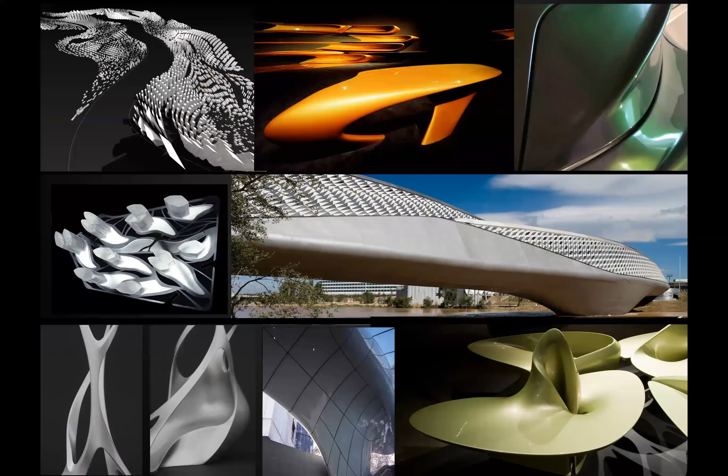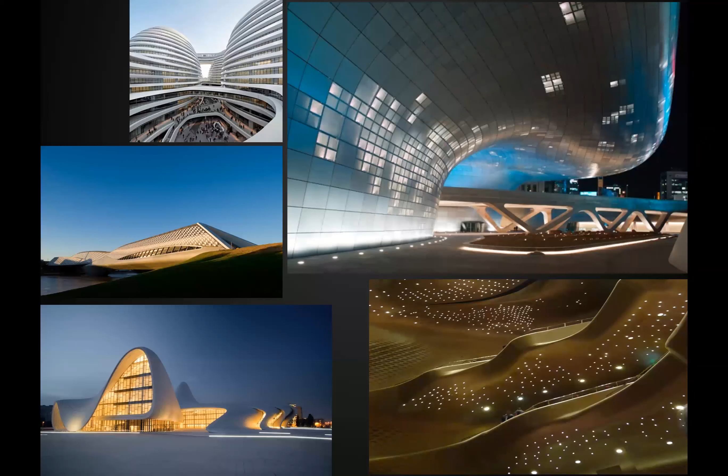Personally, I had the privilege of witnessing the whole process, as a spectator, but also as a main driver and designer at the office of Zaha Hadid Architects, where I've been working since 2005. So I've seen the whole process of acceleration from the early studies, from the beginning where the goal was exploring new forms, to the moment where the urge of making these forms buildable and rational became a much more important focus of the design.

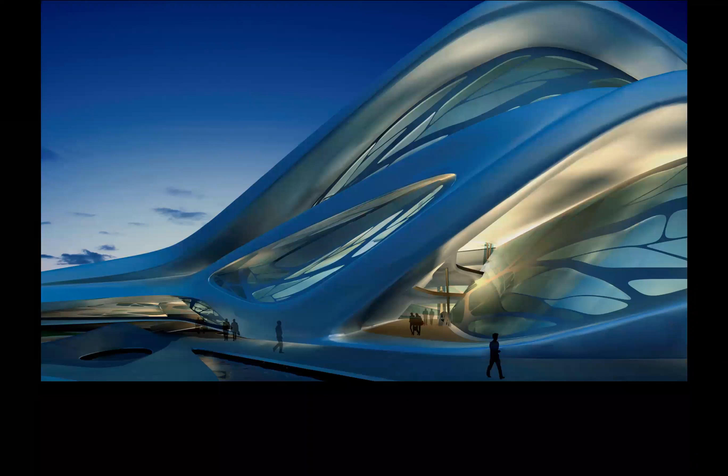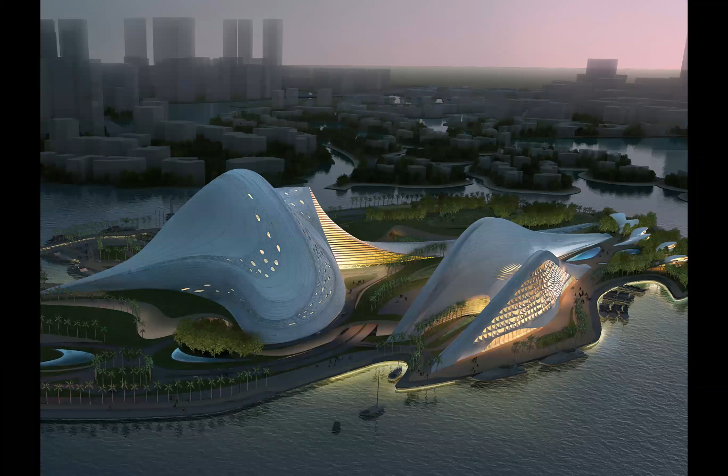Why is that? Because on one side, we managed to achieve beautiful buildings, incredible milestones in architecture. On the other side, there were also a lot of buildings which never happened and will never be built, like the Abu Dhabi Performing Arts Center here, or the Dubai Opera House, because they were simply too ambitious.

I do believe that this is only a transitional period. That's really important to understand. But nonetheless, for you as students and for any professional out there trying to engage with computational design, trying to push the boundaries of the discipline, if you want to translate this into something which can find an alter ego, can actually be brought to reality, it's really important that we think about the dualism between complexity and constructability. In many instances during my career at Zaha, the idea of rationalizing a building and making it buildable came afterwards. I think this is the moment where we need to think about merging these ideas since the beginning, since the concept.

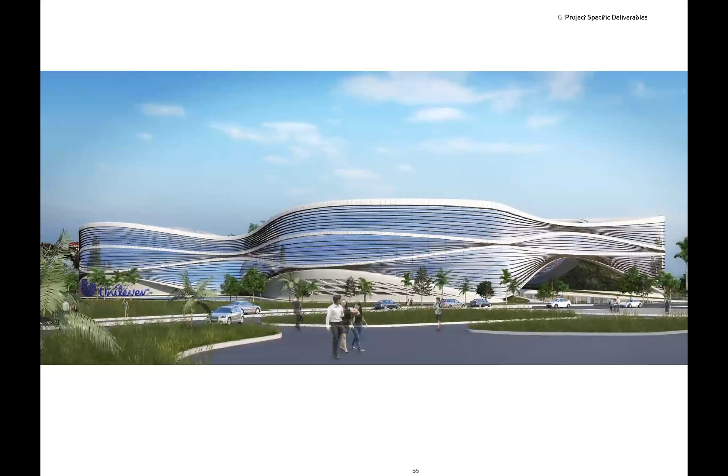That's why I'm going to show you first an example of a building which has been post-rationalized, and then an example of a building which has been imagined, conceived since the beginning to be smart, to be modular, to achieve complexity through a set of ideas and processes which could make it instantly more buildable. So the first building that I'm presenting is a building which unfortunately wasn't built: it's the headquarters of Unilever in Jakarta.

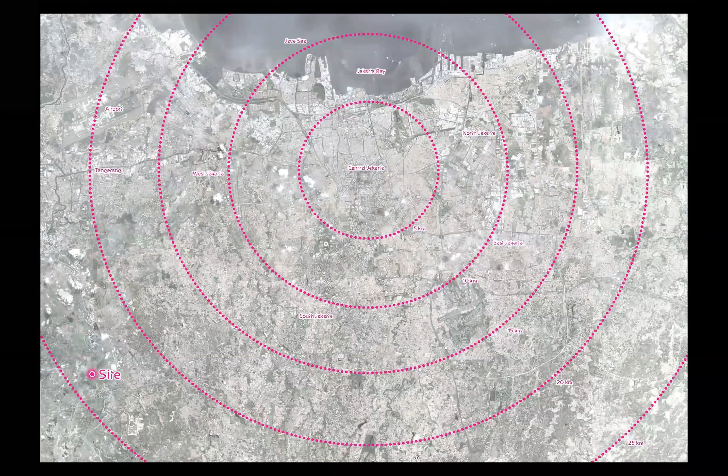It's a competition which me and my team managed to win. The idea was to make this headquarters for this very large company, which basically dominates the market of food, and pretty much whatever you find in a grocery store is a Unilever product.

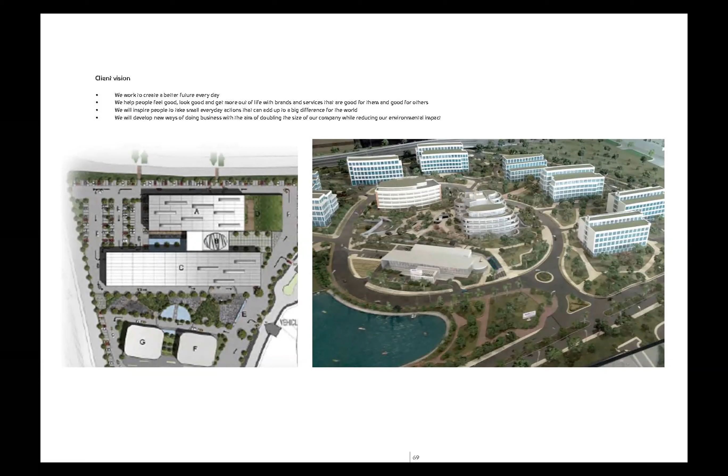The contest site was in the outskirts of Jakarta, in contact with a lot of vegetation, but at the same time with some buildings inspired by the way in Jakarta they crop and organize the cultivations. We were asked to make a building which really tried to integrate the indoor spaces with the outdoor spaces.

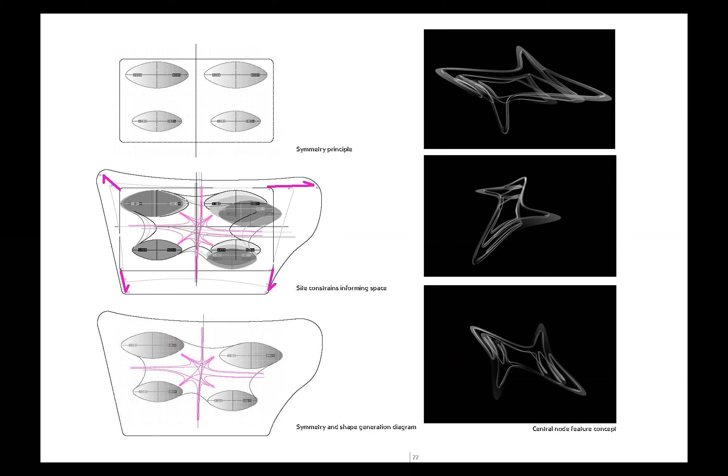So we came first with the concept from a distribution idea: having 4 wings, making sure that different productive departments could flexibly be arranged across the building, and could maximize the space using agile strategies, meaning not everyone is always sitting at the same desk, but departments can expand and contract across the building. That's why there was this idea of 4 wings and a central space.

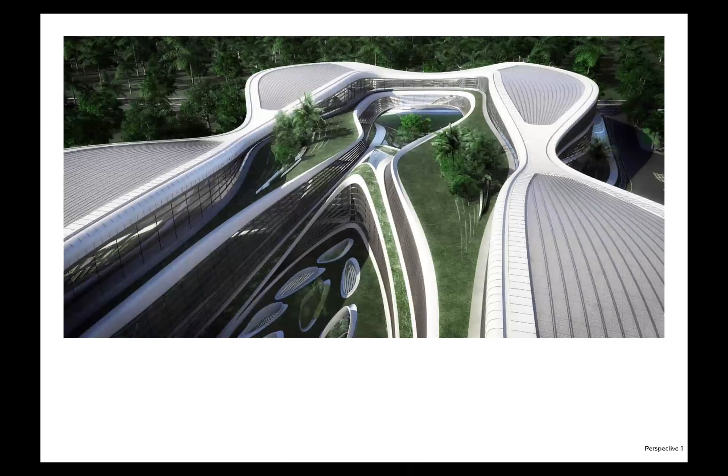Then there was the idea of bridging only the upper floors of the building, to make sure people could enter into this courtyard, which would become a more intimate inner space for the building. This is the idea of flexibility.

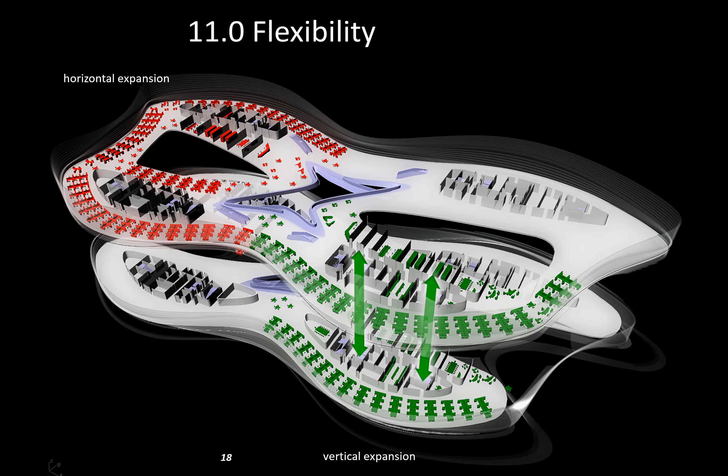The different wings would allow a department to expand both vertically and horizontally, since the 4 vertical cores could allow also for very direct distribution vertically, not only horizontally. The powerful atrium in the middle allowed the building to be interconnected visually, so there could be control over the production. There was this very strong idea of powerful atria and visual interconnection.

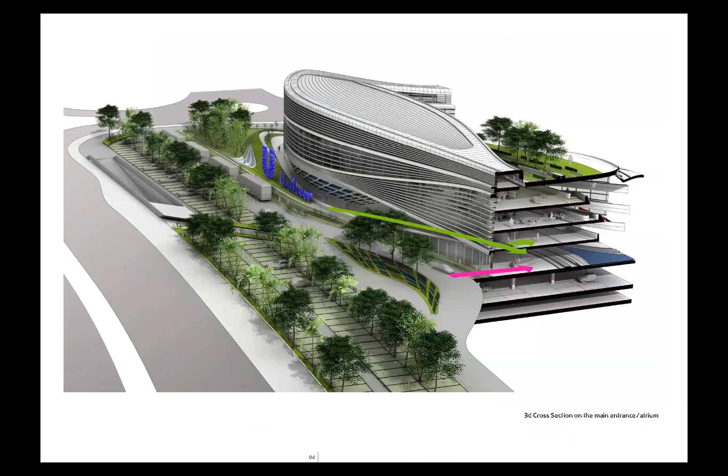Then there was the idea of splitting the flow of people regularly walking into the building, indicated with green arrows, from visitors, who are normally our clients or who have access to the ground floor of the building, where they normally showcase all products and how they want these products to be displayed in a store.

So in a way, the ground floor has direct access to the public, whereas there's this gentle slope which leads you to the internal courtyard, which separates the route of the employees from the route of the guests.

The problem with this was, at the beginning, the concept was based on a slight distortion, almost trying to adapt the building to the site. We won the competition, and we went through a cost consulting exercise with an external consultant, and the total cost of the building was close to 100 million.

The client came back to us and said, we like the concept, but the building must be more in the region of 15 million. So what we decided to do was undergo a very deep rationalization of the building, making sure that the whole plan could be described by continuous arcs rather than an S-spline.

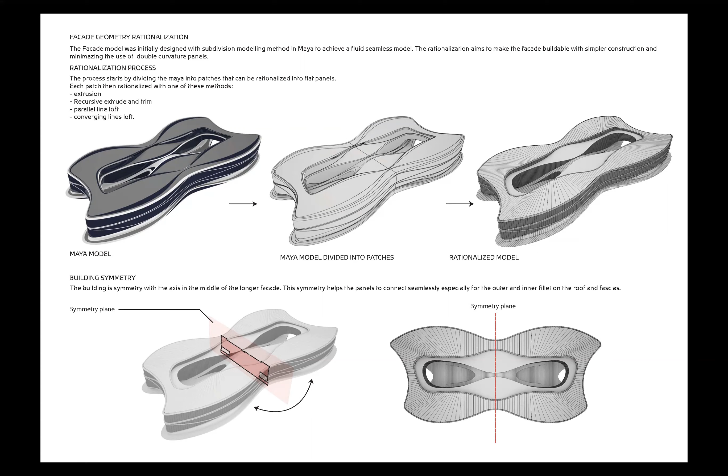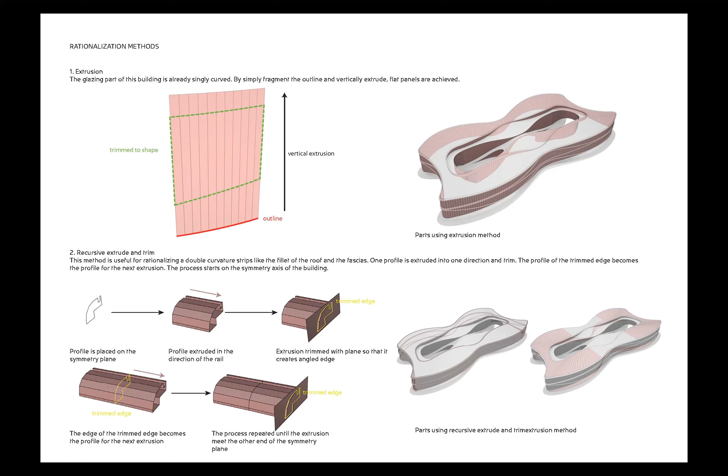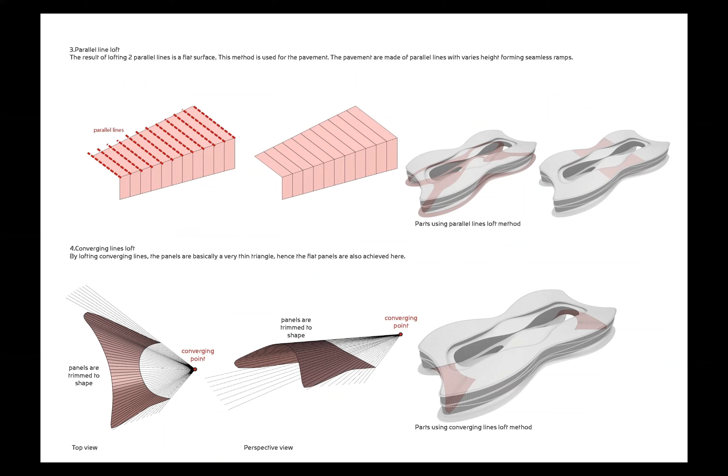We also went all the way trying to make certain parts of the building completely cylindrical, out of a straight extrusion, and other parts, like the underside of the bridge, rather than being a completely organic form, were basically a developable form based on a cone - a conic form.

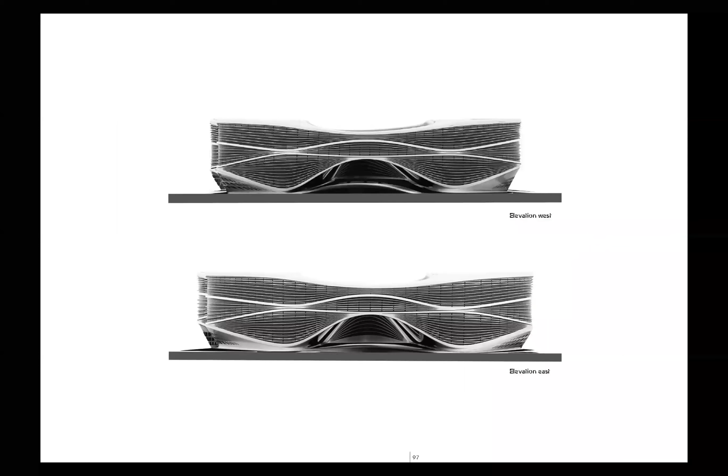All these things led to this more refined scheme in plan, which is very well rationalized. It allows for a number of panels which can be repeated and made out of flat glazed panels. Just for general information, the difference between a singly curved glass panel and a doubly curved one versus a flat panel can easily be twice, if not three times, as much the cost.

By doing this, we do believe that the building still retained the original concept. If anything, it looks more balanced and more refined, but we managed to target the budget of the client - we almost managed to halve the cost of the building while keeping the same idea. That's how important geometric rationalization is when trying to achieve complex and iconic buildings. But this was done at a second stage.

Later on, we got involved in this other project, which is on site and due to be built at the end of the year. It's not very far - it's in Saudi Arabia, the Riyadh metro station. It's one of the iconic stations, part of a network of transports which is going to be the first public network of transports in Saudi Arabia. So it's an epochal change in the country.

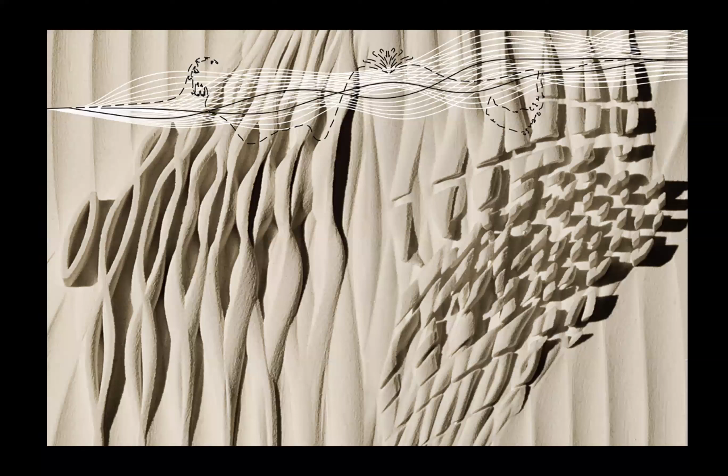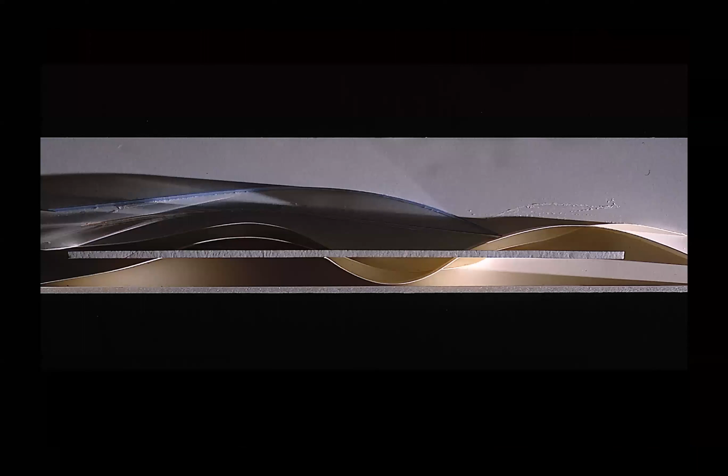This particular station will be the gatehouse to access the KAFD, the main financial center and district in Riyadh, and also connects the district to the airport, facing one of the main roads leading to the city. It's really an important spot because it's going to have high visibility to everyone traveling from the airport to the city.

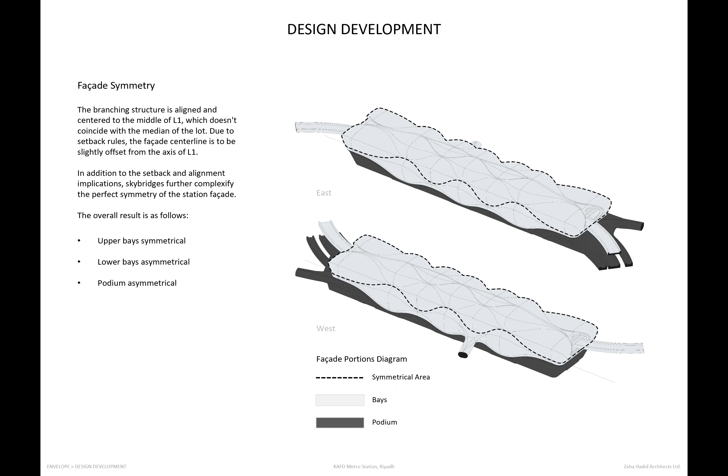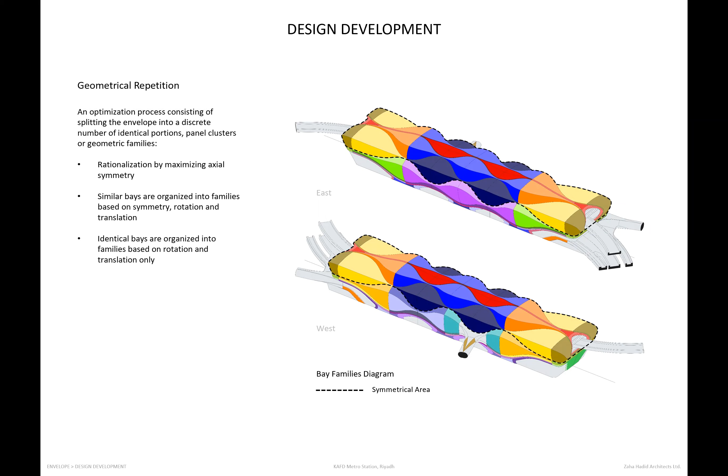Once again, the idea was to be inspired by the waves and dunes of the desert, but even before that, the idea was to implement some sort of modularity in the scheme of the building. We instantly came up with the idea that the entire envelope of the building could be a self-supported dome to free up as much space as possible inside. Rather than going for something completely organic, we decided to have a number of parts which could be repeated, and parts which could be locally adapted to pick up the boundary conditions the building had to adapt to.

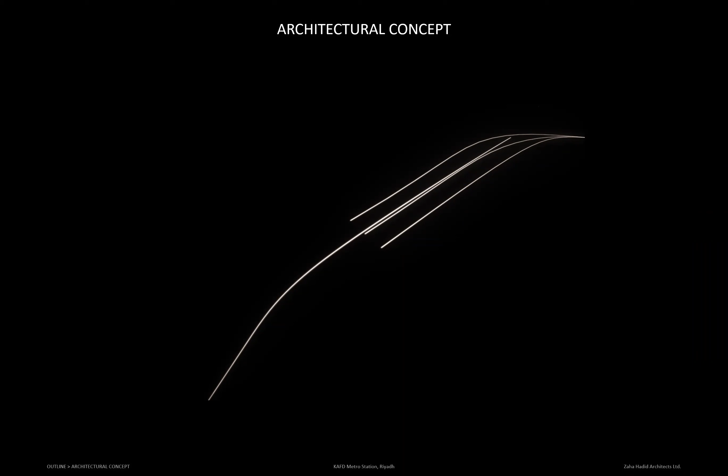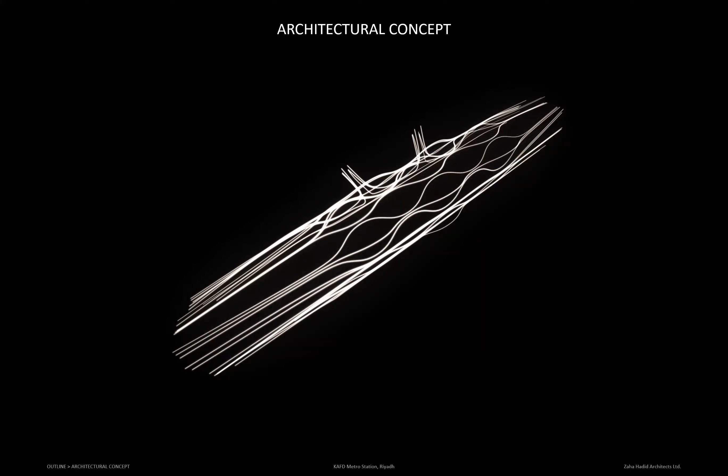So the architectural concept starts from the elongated nature of the plot, and from the alignment to the railways, which were predefined by the brief. We used computational design form-finding to spring and relax these lines, creating this bundle of elements which work like counteracting arches, really transferring the loads from one to another, so they really work like a structure.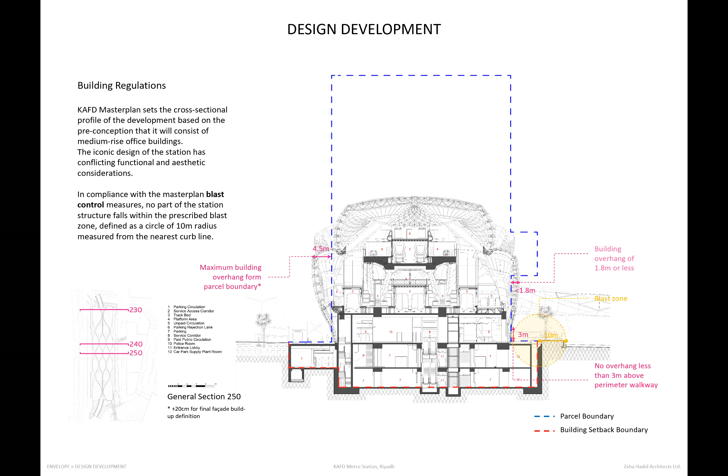In section, this allowed us to maximize the inner space, because the plot was initially defined by the master plan to be a car park space. By the time they fit the rails and the platforms, there was very little room for a general space inside. So in section we came up with the idea of the dome cantilevering a bit to gain additional space, allowing us to create a quality space around the platforms, which of course were defined by very strict codes and dimensions.

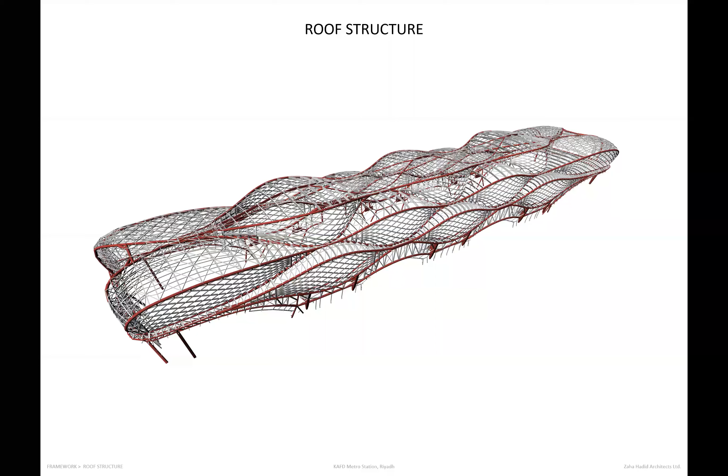So this is the diagram of the roof structure. In order to stiffen the arches, we inserted this diagrid, which also acts as the main facade - this is where the porosity of the facade and the glazed elements will be located. Here you can see some structural elements, the diagrid, and the solid roof. Everything, in a way, is part of a system where all the parts act together.

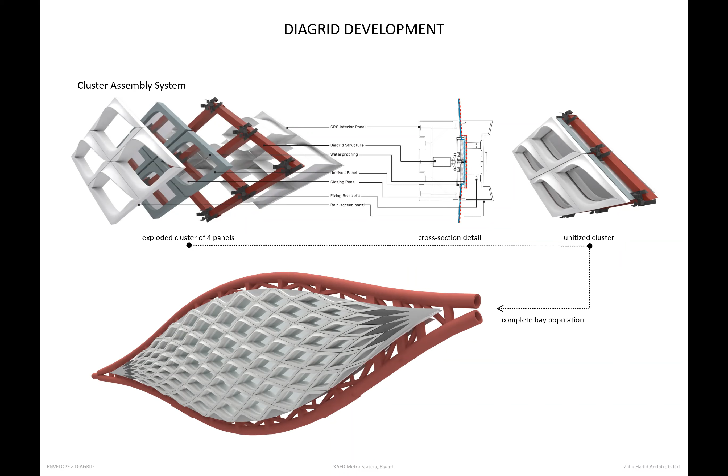This allowed us also to create a cladding system which is completely unitized. We used the same technology for both the solid parts and the glazed parts, and designed the structure so that the pace of the structure matches the pace of the panelization. By reaching this level of integration, we avoided the need for a secondary facade structure - the joints and brackets could be fixed directly to the primary structure.

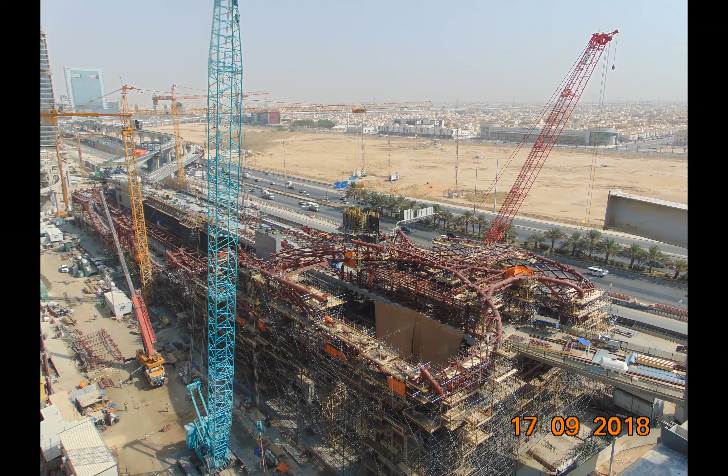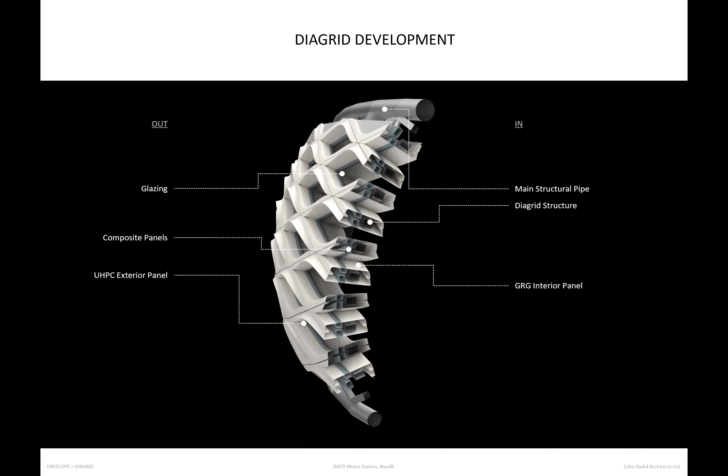These are some pictures on site. You can see how the building is absolutely one-to-one coincident with what we've been designing. And here you can see how the unitized element wraps the diagrid, providing outside the cladding with insulation and glass, and inside, a second cover which becomes the inner finishing of the building.

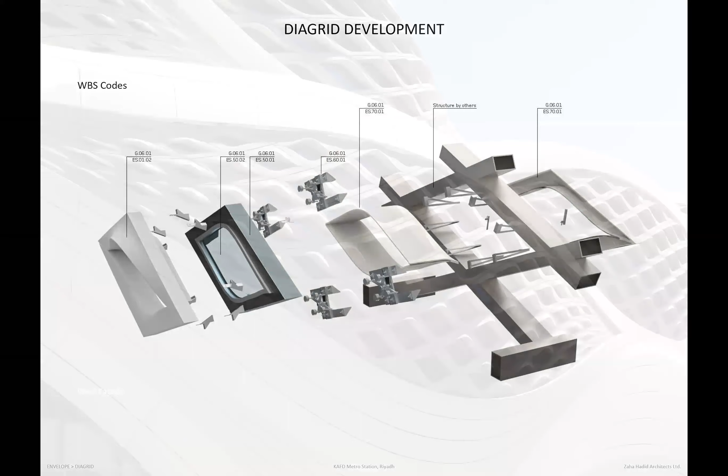Here you can see all the layerings, and basically the same concept is applied to the solid element - the shape of the panel changes but the technology is the same. So when constructing this building, you can easily repeat the same steps. The fact that the whole building is modular and symmetric, with some repetition, allows reuse of the same molds for a number of panels, so you can produce the whole panels with a fraction of the cost by repeating and reusing molds to make the same components.

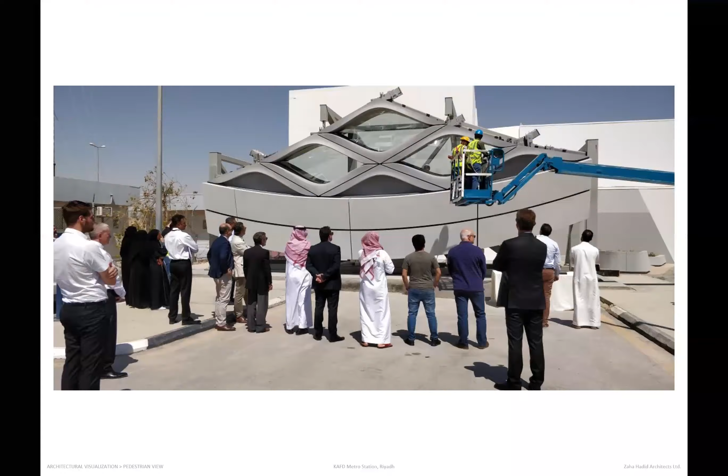The architectural concept - now that we know a little about why this building looks like that - it's really important to understand that another strength of this concept is the fact that it's been designed from inside to the outside. So first we came up with the internal distribution, and then we understood what we needed to wrap it.

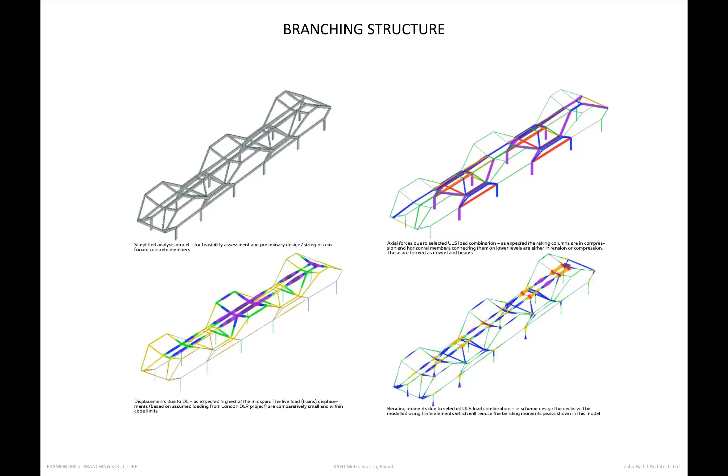All the concepts I've been describing earlier came from the idea that we had to resolve functionally and from a distribution point of view the building. The idea, since we were starving with space, was not to have a main structure which would support the different platforms.

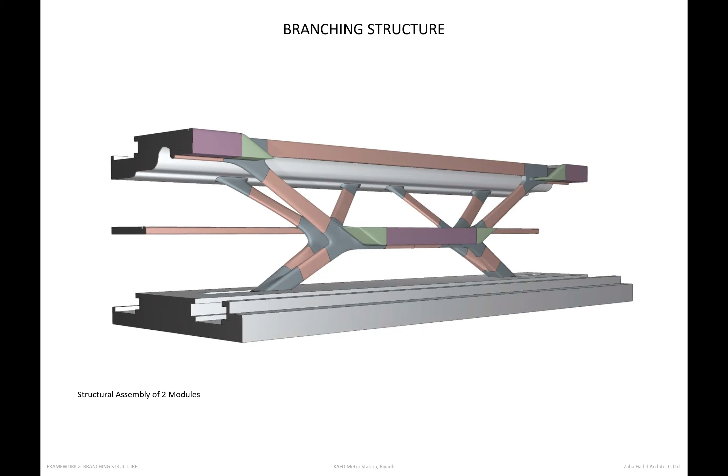Since it's a multi-story station accommodating 3 different lines, we decided to use these diagonal columns or branching structure and couple it with the vertical circulation. So the structure and the required amount of escalators and the distance between them, in order to optimize people flow, had to be absolutely coincident.

This element takes into account not only the structural loads, but also the distances and the amount of escalators you need to distribute all the levels of the station. There's a very strong synergy between the vertical circulation and the inner structure of the building, and this becomes the backbone for the design of the facade.

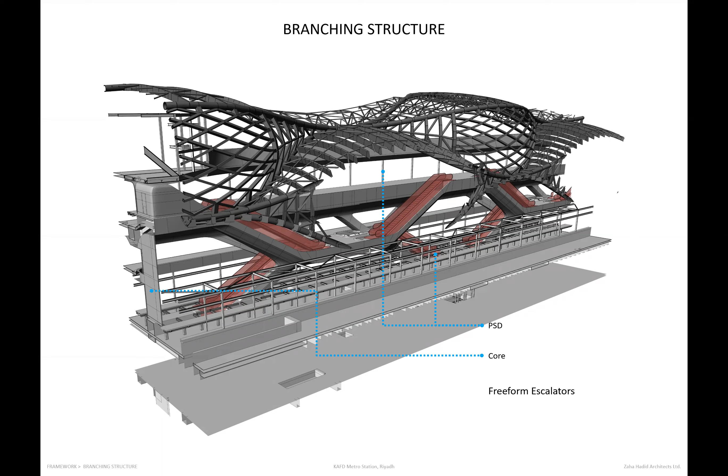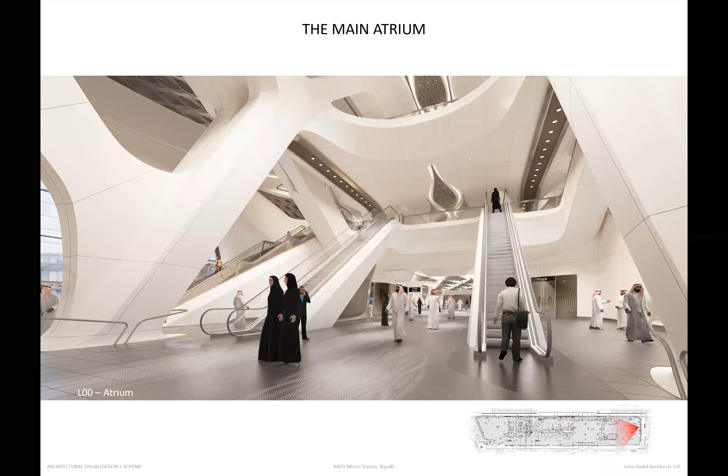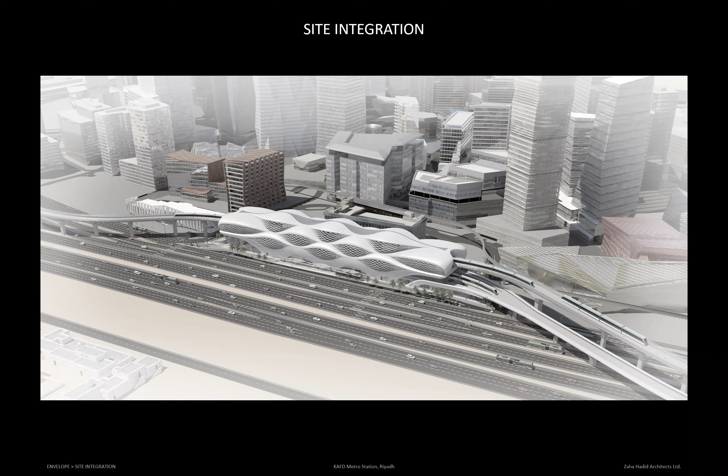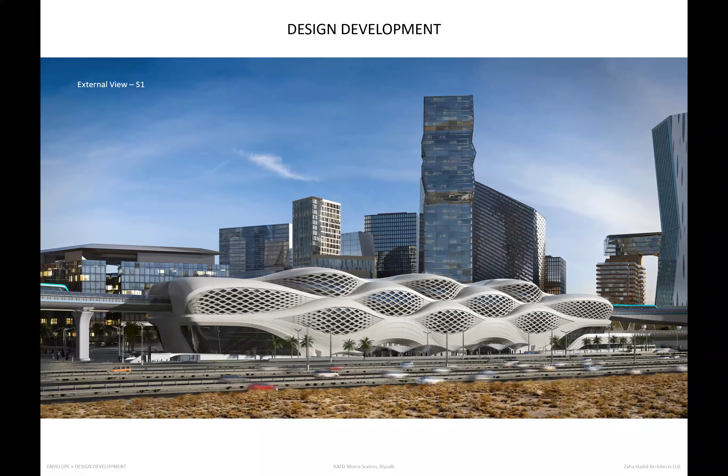The outer design is the expression of the structure. There's nothing added besides the need to clad and protect the inner structure. In a way, there's a very strong integration with the site, although modularity is the key element. Modularity doesn't mean repetition - it means you use repetition where required, but use local changes to adapt and totally integrate your building to the context.

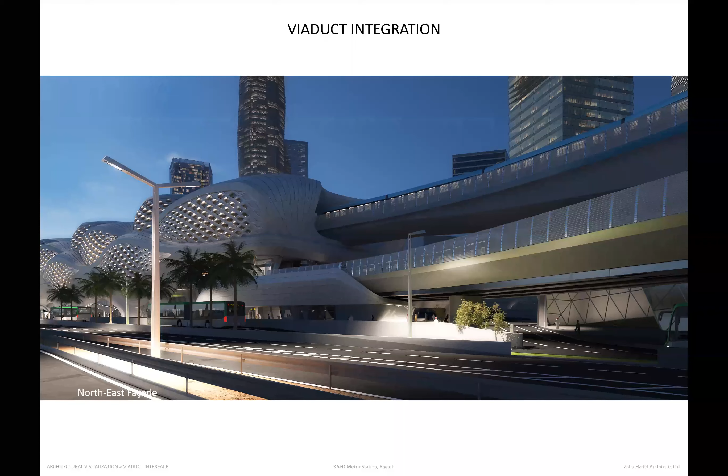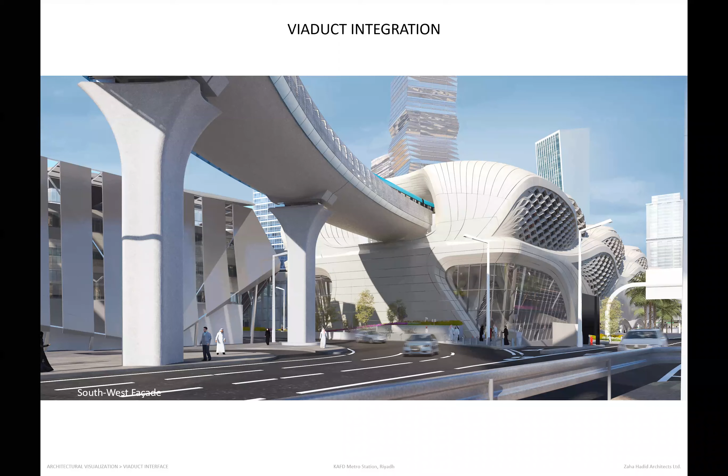You can see how the viaducts are integrated and picked by some local gestures, how the viaduct becomes an element which is completely independent. It interacts with the building, but we are not trying to make it part of the building.

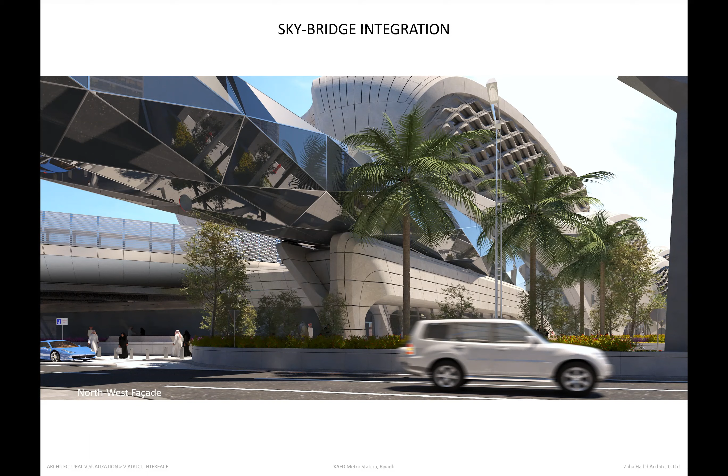Also because of movements, the sky bridges are a very important feature. The whole KAFD is distributed at the first floor through these air-conditioned sky bridges, designed by the architect in charge of the master plan. So we had to pick this design and integrate it into our fluid design.

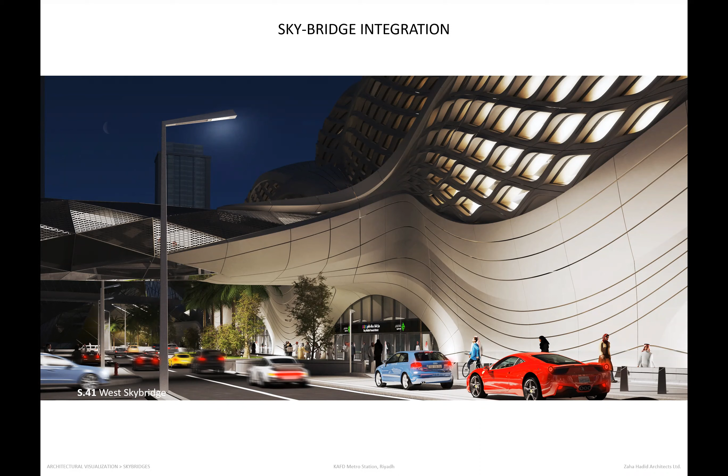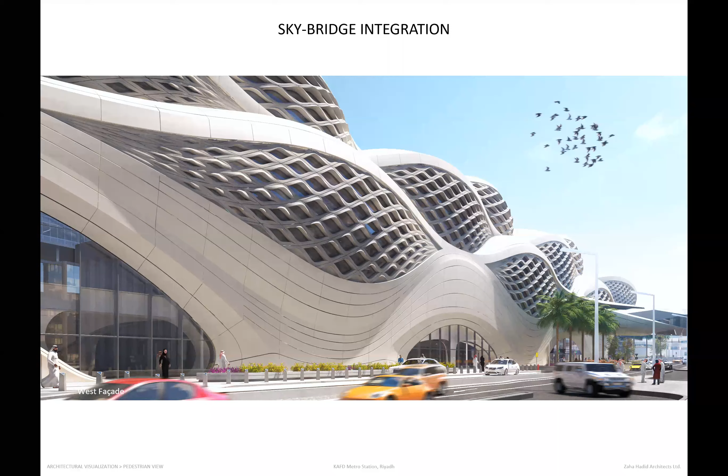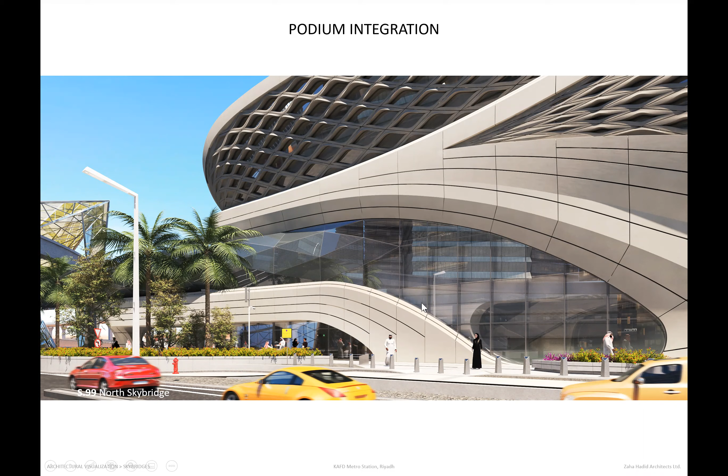We came up with these fluid shapes, which at some point blend into the triangular shape of the transparent diagrid. We managed to create this sense of mutual integration rather than an abrupt fracture between the two elements - literally creating a transition from our flat glazed facade to the faceted element of the sky bridge.

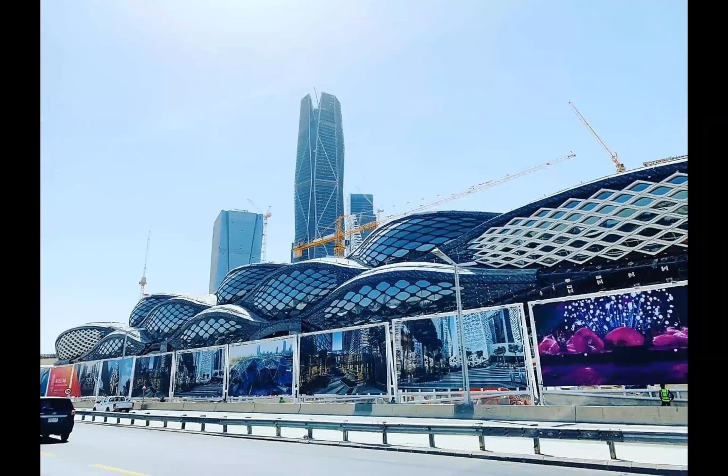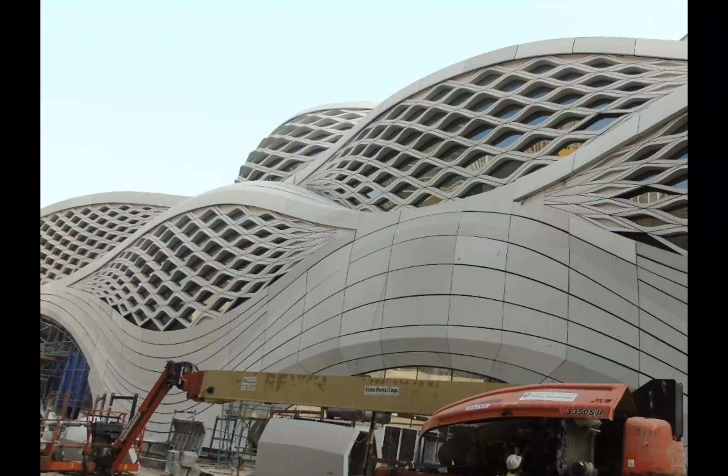Here are some steps into the construction - this is from a couple of years ago, then earlier this year, and this is pretty much what we have now. It's almost finished. I really believe this was an excellent example of how you can think about rationalization since the beginning of the design process.

Of course, this idea doesn't need to stay with large buildings - it can be applied to pretty much everything in architecture. Lately, as I set up my own practice, I had the opportunity to design an interior space within the Opus from Zaha Hadid Architects - kind of a funny coincidence, totally coincidental. The idea was to create a kind of vibrant and interconnected space for this young and successful company.

The idea was to allow total visual interconnection between the different members of the team, but at the same time also creating some sort of intimacy. The client was keen to have something resembling the sand dunes again, and also the warmth of sand. So we used this specification of wood to remind of that, while wanting to create something engaging but staying within a set budget.

The spaces are all subdivided between enclosed executive offices, which are transparent but acoustically insulated. The other side is an open space office, where we decided to cluster the different desks using a honeycomb structure rather than traditional rows, because this allows more interaction between the different members of the team while still creating some sort of intimacy.

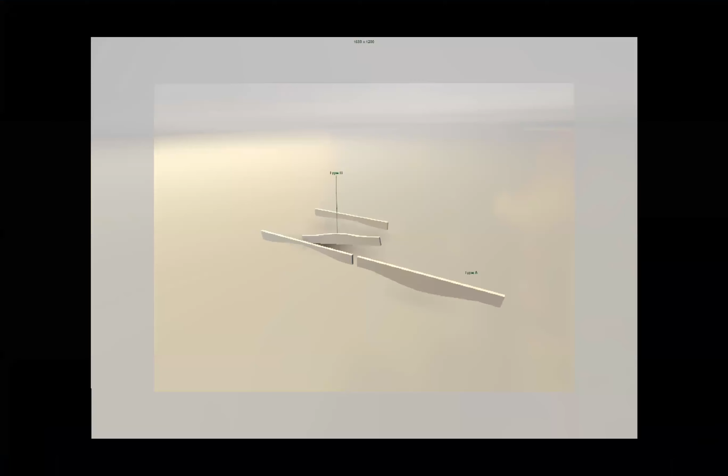A script has been used in order to populate and make them into kind of sand wave shape. So it's about achieving simplicity. Complexity through simplicity, trying to achieve the maximum from a limited amount of parts, simplifying construction and reducing the amount of wastage in materials.

This definitely allows you to make complexity more recognizable, because I do believe if we achieve something too complex, the amount of complexity we can generate nowadays with computational design is so powerful that you can easily get something where the rule is no longer perceivable from the human eye. So you need to set some constraints, not only for construction, but also to make sure that your original idea, the rule that underlies your composition, is readable, is not overly complicated, that transcends into chaos.

All this experience is something that I'm also bringing into my teaching experience every day. And as I said, I do believe it's only a transition. At some point, very closely, we're going to be able to make use of digital fabrication to manufacture pretty much everything we want. But at the moment, the construction industry is still largely based on a modernist paradigm.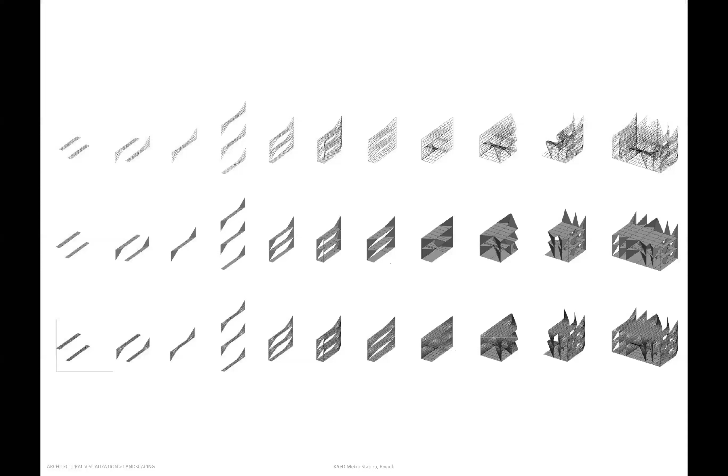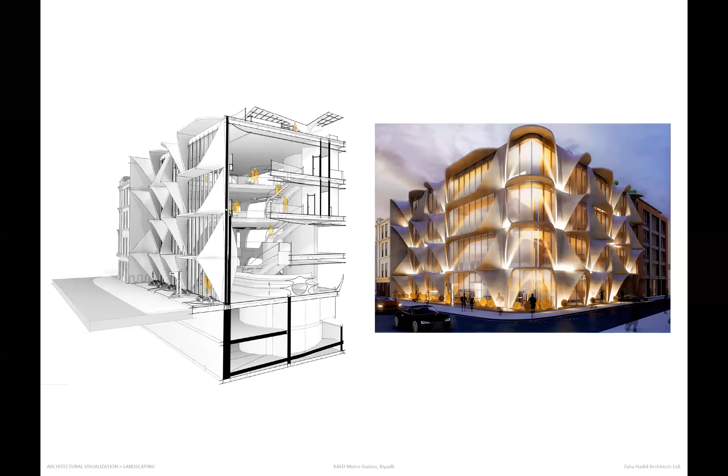Because of this, with our students at the MA Architecture and Urbanism and the MArch at the University of East London, we are working on this framework where we start from components, and then we study the structural nature, the performative nature of the component, the materiality. This becomes a framework to generate projects where repetition is not actually taken as a constraint, but as a kind of creative tool.

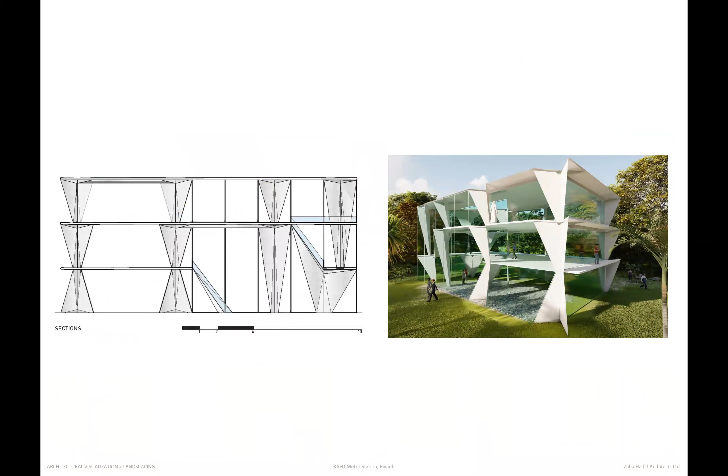Here we can see different expressions based on different structural principles, the fold, the minimal surface, which can still achieve a very high level of variation and adaptability, but using only a discrete amount of parts.

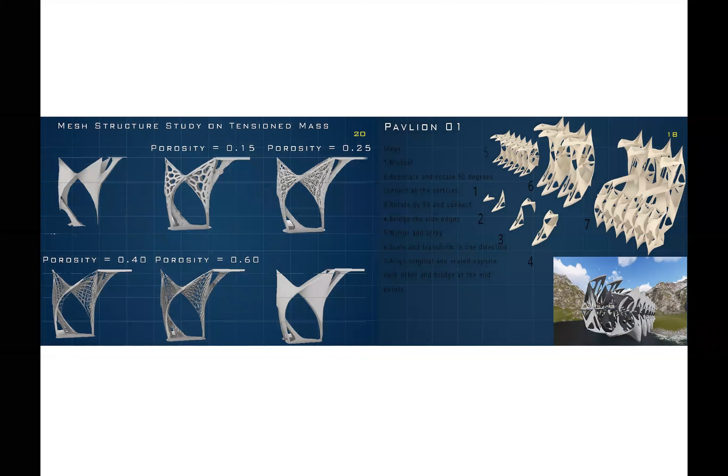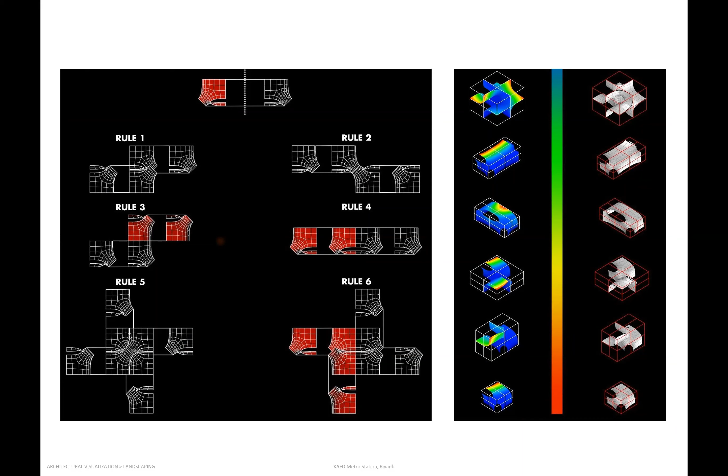Also going into the experimentation of minimal shapes, more complex forms, but still based on repetitions and modularity. All the way going to this very interesting take that one student did last year, where he almost managed to resolve the whole project using only 2 or 3 different forms. He could then make and manufacture the molds and show the final result, which doesn't look like anything repetitive.

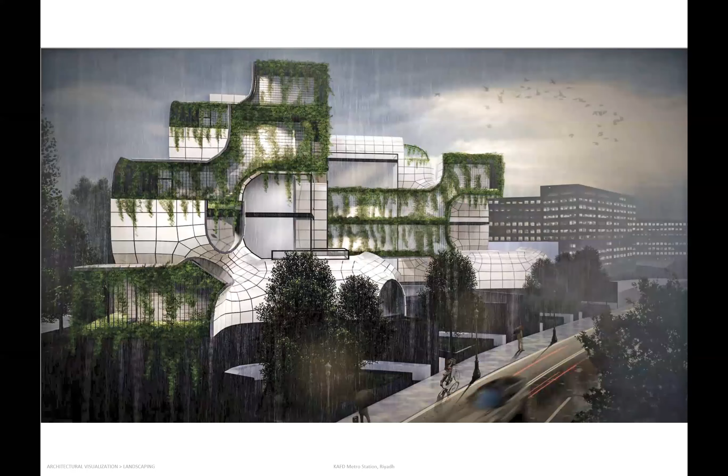It still also allows to have a very strong integration between vertical circulation spaces and architectural language, but it is made from a high level of repetition of the parts.

And of course, moving this forward into digital fabrication, trying to understand how modularity helps you and fast tracks the manufacturing process, especially when you want to use digital manufacturing, because at the moment, digital manufacturing is not something easy to bring on site. It needs to be prefabricated.

So the modularity of it allows you to prefabricate parts and then ship them on site, and then reduce the amount of time that the construction site is going to take. So by doing this, you shift the cost of the complexity by reducing the length of the construction site.

Here, another experiment using robotic hot wire fabrication to create the molds, and water-formed concrete sheets to create the final panels, trying to experiment with eco-sustainable variation of concrete. And then, once again, breaking down more complex forms into repeatable modules.

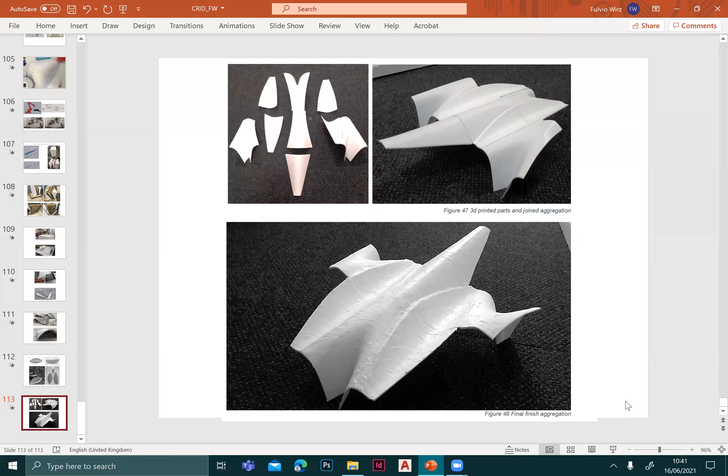I have another question from the Q&A: if I were to create a modular design, how can I make sure it's modularity and not repetition? And how can I differentiate between them? The idea would be not having always the same element, but studying a set of different parts used to accomplish different tasks. For instance, if we were to make a residential building, our modularity could try to tackle different scales.

Even within the same module, you can have a larger glazed element, a more perforated glazed element, and by alternating these different parts—which need to adapt to the internal condition of the building and to the external context—you make sure your building is still modular, because it's made out of parts within preset sizes that can interconnect with one another. But these parts can vary; the amount of modules you want to use is totally up to you. The more the construction industry is able to integrate digital fabrication, the larger the number of modules we'll be able to produce, until the difference between something modular and something completely freeform becomes invisible.